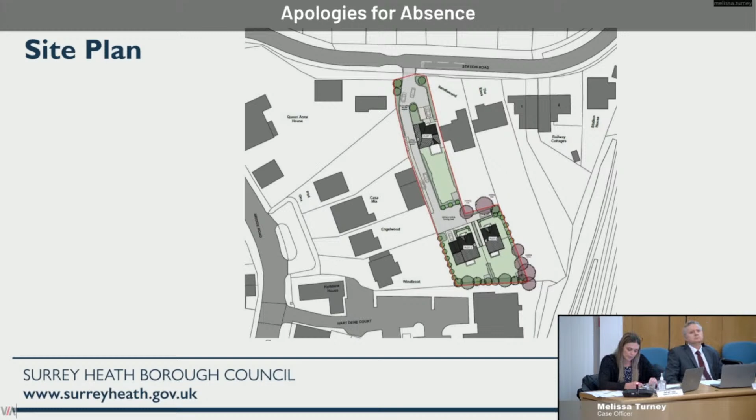This is the site plan showing the replacement dwelling to the front of the site, which is plot 1, the access road down the western boundary, and the 2 dwellings to the rear. It also includes the turning head, the waste collection point, and the parking for the 3 units.

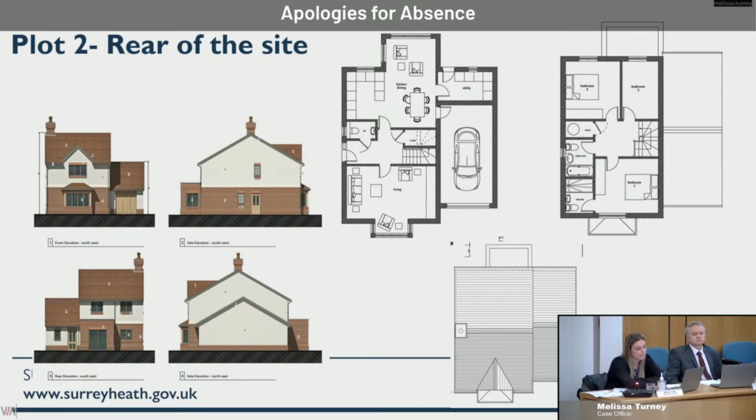This is a reminder of what the dwelling to the front of the site, plot 1, will look like, including the elevations, the floor plans showing the 3 bedrooms, and the street scene view. This is the elevations and floor plans for plot 2, which includes an attached garage, and then plot 3, again with elevations and floor plans.

Overall, members are reminded that at the meeting in August, members indicated a preference for refusing the application based on character and design, highways, and amenity impact. However, following discussions on the night, it was considered that the reasons given were not defendable at appeal. Since then, there have been no material changes to the site or to planning policy, and the reasons given would remain undefendable at appeal. Members requested upfront information to be submitted to satisfy concerns over drainage on the site. I'd therefore ask members to focus on the drainage scheme before you this evening.

The rest of the presentation will go through the submitted drainage details. The Council's drainage officers worked closely with the applicant to reach a design solution that is acceptable and complies with national policy and the core strategy requirements. The drainage scheme needs to be assessed against national policy and the core strategy.

NPPF section 14 addresses flooding. The application site is not located within flood zone 2 or 3, nor is it over 1 hectare, and therefore a flood risk assessment has not been required. The proposal includes a sustainable drainage system to reduce surface water on the site and to mitigate any potential increase in surface water flooding.

Policy CP2 of the core strategy requires developments to be climate change resilient, in particular reducing the risk from all types of flooding. Policy DM10 sets out that developments will be expected to reduce the volume and rate of surface water runoff through a sustainable drainage system. The PPG sets out that design flood events for surface water should be based on a 1 in 100 year event.

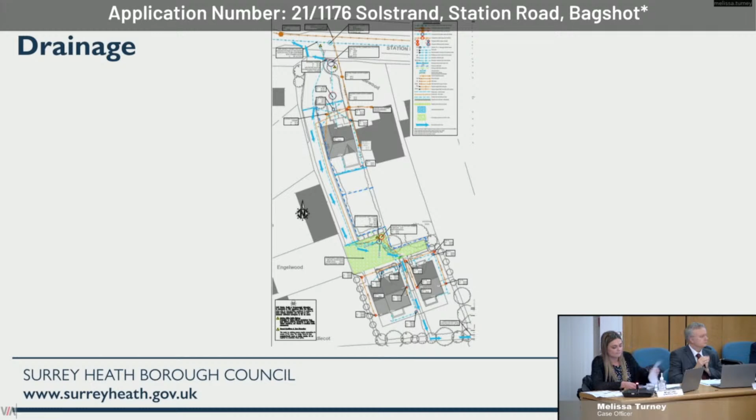Thank you, Melissa. This application met the threshold for residents to speak, but unfortunately that request wasn't received in time. I understand that their local councillor is going to read a letter on their behalf. Before doing so, could you please just confirm that these are the words of the residents and not your own words, Councillor Wheeler? After that, we'll move to questions.

Yes, thank you. I can confirm that these are not my words, I am reading them out and I still have an open mind. I have two objections. I will read them as quickly as I can and hope that they're still readable, listenable, I mean.

Right. First of all, our residents would like to thank the drainage engineer, Wayne Purden, for visiting the site and taking the time to walk around with them and acknowledge that there was a problem immediately below the site.

Right, this is from the resident. Having reviewed the surface water and drainage strategy, we are objecting to the planning application for Solstrand for the following reasons. In general, any plan which is predicated on pumping sewage and effluent up a hill using multiple pumps and holding areas is not a good plan, as it is fraught with difficulties and opportunities for things to go wrong. This would result in the potential for effluent to mix with surface water, causing a potential health issue, along with the associated smells and discharge next to the floodplain.

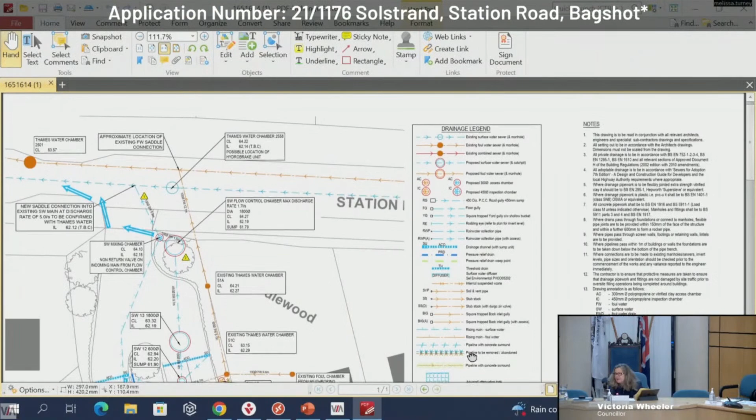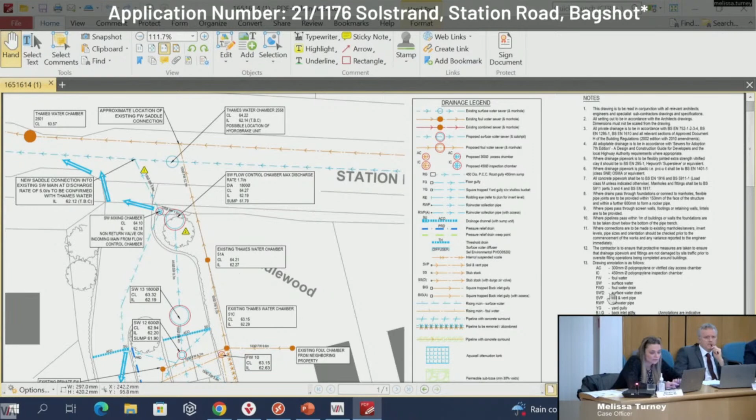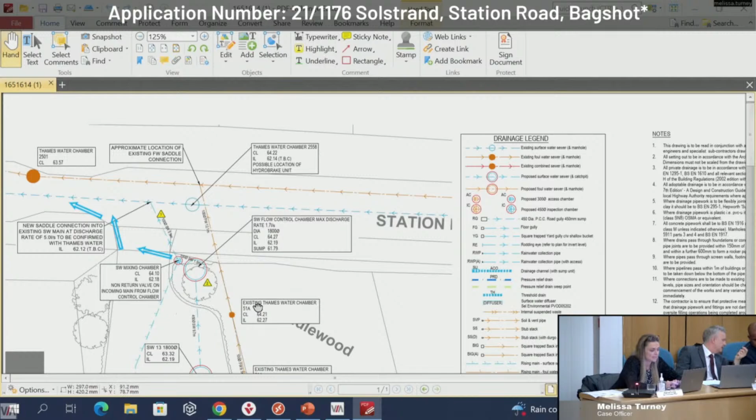There you go, it's quite a detailed plan, so I've zoomed in quite far. That's the connection that will be made up the top here into the Thames water, outside of the application site and not within any neighbouring properties. And you can see that all the drainage being proposed is solely within the application site.

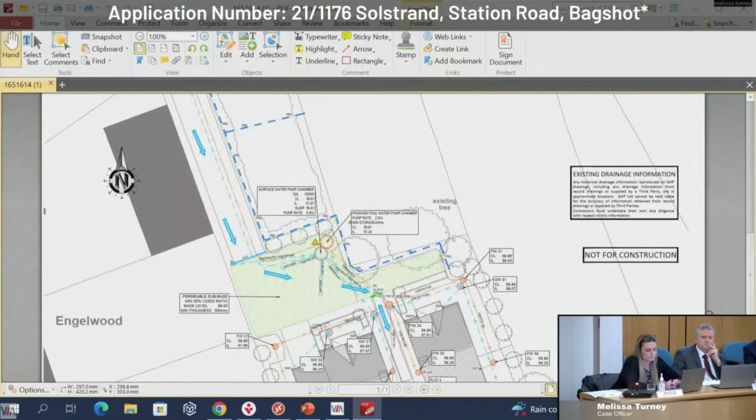And where's the Elms on that map, please? So they're this neighbouring property along here, so their garden just runs... can we zoom in to see that there is no requirement at all to channel surface water directly onto that property?

Yep, so that's that bottom corner of the site there. So there's no pipe work being proposed down there. I'm just reading the resident's objection letter again - it says channel surface water directly onto my property. So they're going to channel the water between plots 2 and 3 and down to the south eastern part of the site, so it won't be into that neighbouring property.

Again, that's the worst case scenario if the pump system failed, but a maintenance plan has been put forward to mitigate for that. So the plan you're presenting wouldn't require the consent of the Elms, as far as you understand? No, it wouldn't.

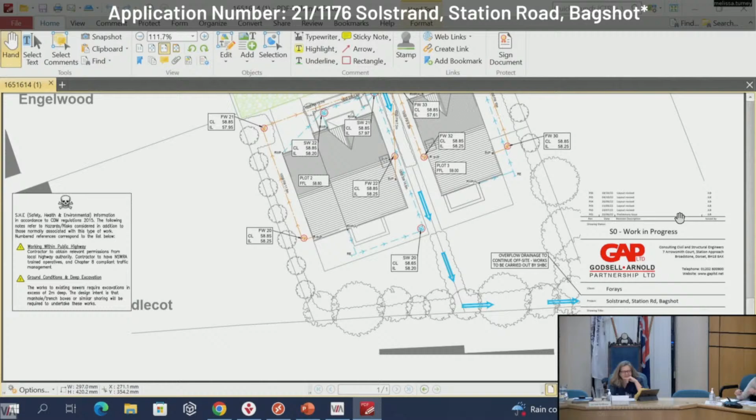I don't know if this is a planning issue or not, but looking at this, I assume this is going to be 3 separate freehold plots. Who is actually going to own the approach road and turning head? Because the owner of that is surely ultimately liable for this system, because it's going to run underneath it.

So it'll be jointly owned by them, and the managing company will be responsible for that as well. The future occupiers will likely pay a service charge, which would maintain that road. So they are liable for it, but if they opted out, they'd just have to take the consequences. I'm trying to think of liabilities.

I mean, you're in danger of getting into deeds on properties and covenants. That would be outside the planning system. It would be part of the purchasing process, and that would all be part of the deeds and covenants.

Councillor Gordon, and then I think we'll have a summing up and a vote. There's still some ambiguity here. The residents, when they met with the drainage engineer, were implied that there would be a connecting pipe, which you said so far there wouldn't be on the plans. Now the plans are quite technical - is there any way at all the residents who met with the engineer could make a comment on the plans while they're here now?

As it's quite technical, just to explain - they're saying the plans don't represent what they were told. So if the plans are possibly incorrect, I don't want to approve something that's going to be incorrect. They were here, they met the engineer - is there any way at all we could get them to make a point of clarity?